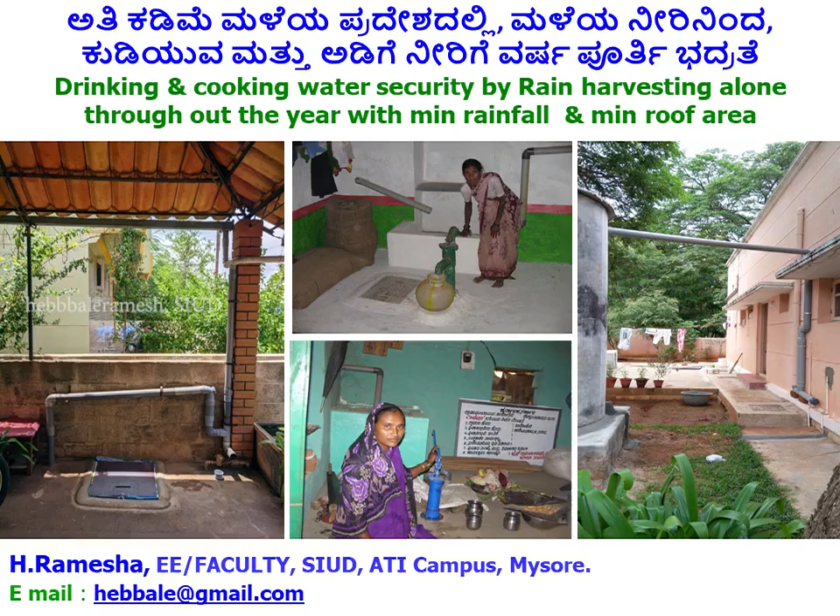In olden days, groundwater was enriched with forestation and the existence of tanks; recharging was going through a natural process. Now, due to urbanization effects, infiltration of rainwater has become less and runoff water has become more. Due to increasing population, industries, and over-extraction of groundwater from bore wells, the groundwater table level was drastically lowered.

Hence, in this session I will give importance to drinking and cooking water security by rainwater harvesting alone, throughout the year, with minimum rainfall area and minimum roof area. Before going to this topic, we should understand water resource availability in India.

We had 117 centimeters average rainfall, which is second highest in the world, more than 2,100 major rivers, 13 lakh minor irrigation tanks. We had the south-west monsoon and north-eastern monsoon, and perennial water sources from Himalayan snow rivers. Just imagine, if we didn't have the Himalayas, the Ganga basin would have become a desert by this time.

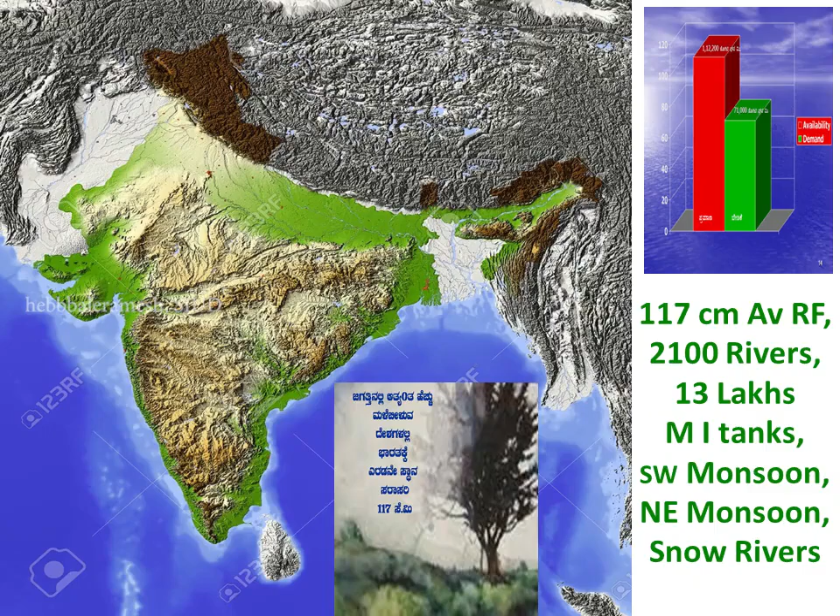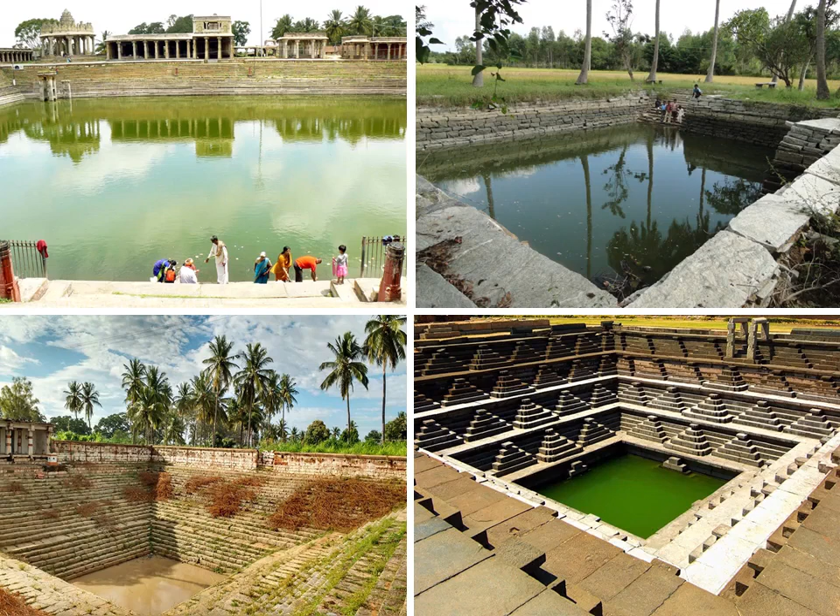Our ancestors had beautiful forethought about water conservation practices, with water management skill also. They had constructed beautiful architectural structures for water conservation for their routine uses. Also, our ancestors constructed pushkarnis, kalyanis, lakes, etc. for their utilization. Almost every village had water temples.

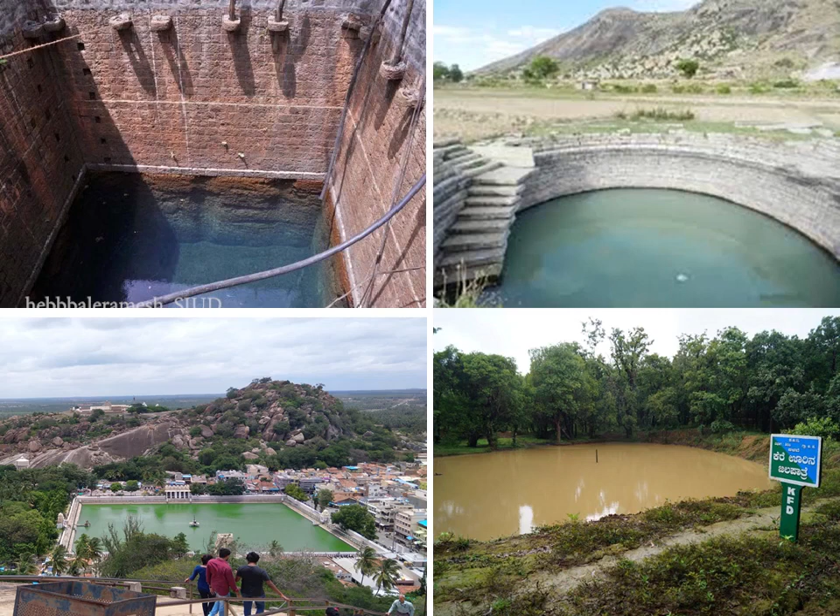They had also constructed stepped open wells, kund, kalyanis, pushkarnis near temples. Public tank or tanka water was used for drinking purposes. Now it is like engineering marvels to bring water and life together. Now, the situation is entirely different in India.

In places that may be desert, Himalayas, semi-arid regions or dry belt zones, there is compulsion to walk to bring drinking water for daily needs due to the highest water scarcity. For a few years, we are observing heavy movement of drinking water tankers due to scarcity of water, almost from villages to cities, especially during the summer, that is, during March, April and May, irrespective of highest rainfall area or

lowest rainfall area. Even though we had more than 4,500 millimeters average annual rainfall in the coastal, Western Ghat, Malnad area and 450 millimeters average annual rainfall in the dry belt region in Karnataka, with a difference in proportion of 1 in 10, even riverside cities are also facing drinking water scarcity during summer.

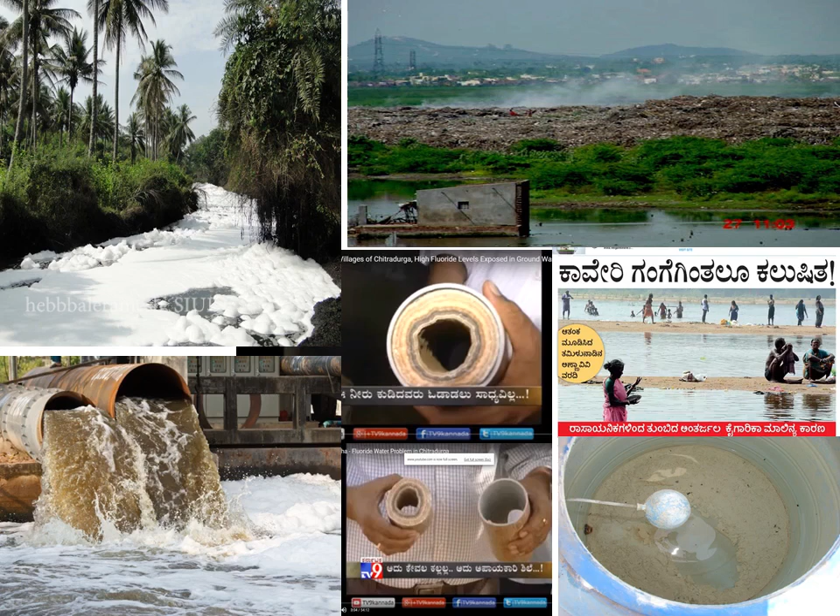We are observing, in almost all places, drastic degradation in quality of water and contamination of water sources in many ways, due to entry of industrial waste water, sewage water from urban areas, etc. Even water from bore wells was also degraded, causing hardening or scaling of water supply pipes, storage tanks, etc., which results in spoiling of plumbing fixtures and increase in maintenance cost.

Due to over-extraction of groundwater from bore wells, the fluoride problem is drastically increasing in that water. The usage of fluoride-contaminated water causes dental fluorosis, arthritis, bending of bones, etc. in human beings and also affects animals. Degradation in quality of water causes various types of illness, which in turn leads to suffering.

The presence of excess TDS, fluoride, aluminium, chromium, nitrates, sulfates, magnesia, iron, etc. in bore well or sourced water causes severe effects on health. The permissible limits of water quality parameters are shown as per Indian standards. If we drink pure rain water regularly, about 60% of the serious threats to health will come down without any medicine.

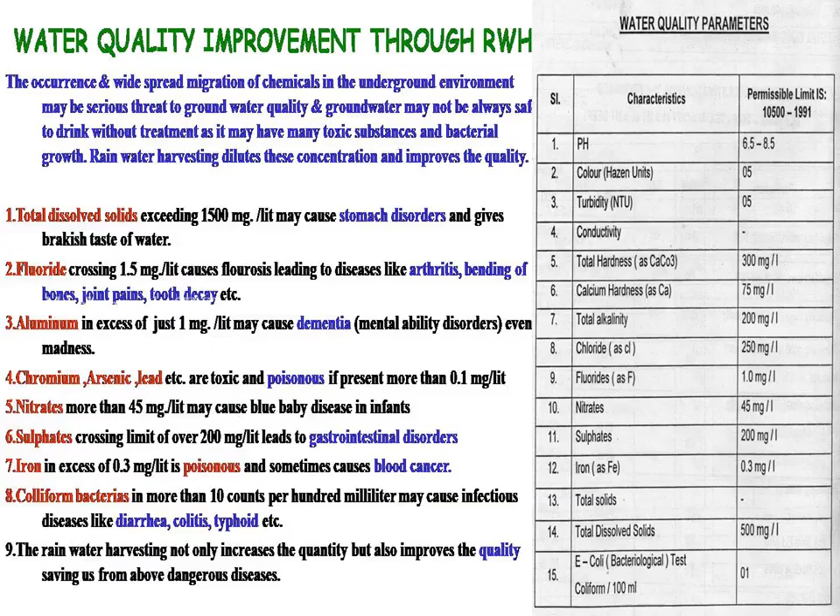Disadvantages of hard water at the domestic household level are: hard water is sticky with hair and skin. It does not satisfy thirst, especially during the summer. Heavy scaling of water. Dal is difficult to cook and takes more time, which results in consumption of more LPG gas.

By this it consumes more, which is expensive. Rice prepared with bore water looks yellowish and spoils early, especially in summer. Use of hard water leads to more consumption of soap and detergents, frequent maintenance of water supply fixtures, frustration and dissatisfaction in using hard water, etc.

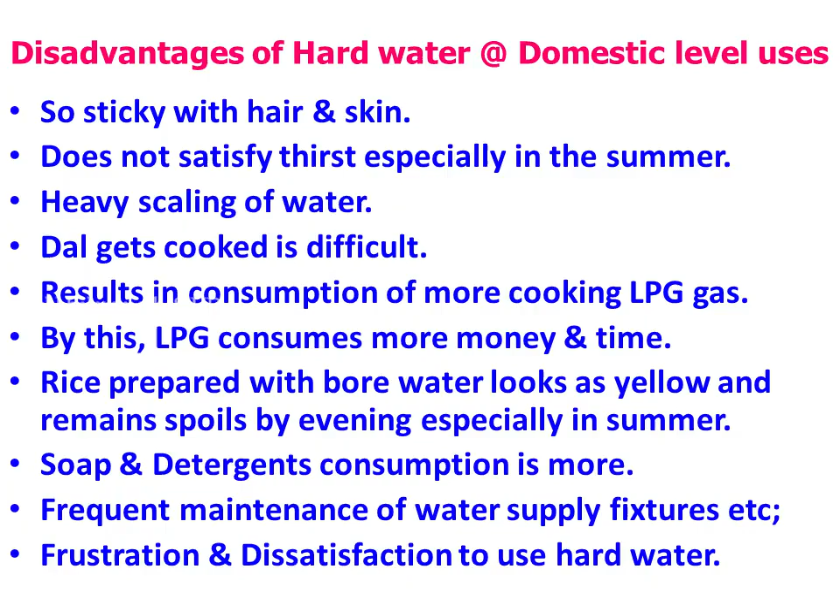Let us understand our mindset first. We are calculating the unforeseen bore well water yield in terms of 1-inch yield or 2-inch yield or 3-inch yield. But the irony is, we are not calculating the visible rainfall over us in terms of quantity, quality and its utilization. If one drop per second is wasted, it amounts to 20 liters of water wasted in a day. Hence, each and every drop counts.

We have to realize water is a community resource, which absolutely needs community participation. Also, water saved is equal to water earned. If we are aware of the calculation of rainfall quantity itself, our water literacy problem will be solved. Awareness or water literacy is the very first step towards mindset change. If we change our mindset, about 50% of the progress will be achieved towards water conservation.

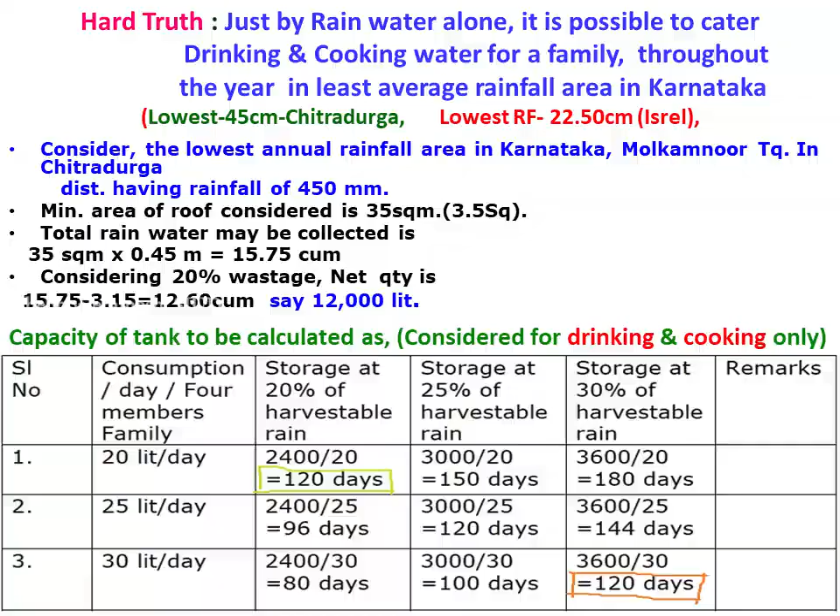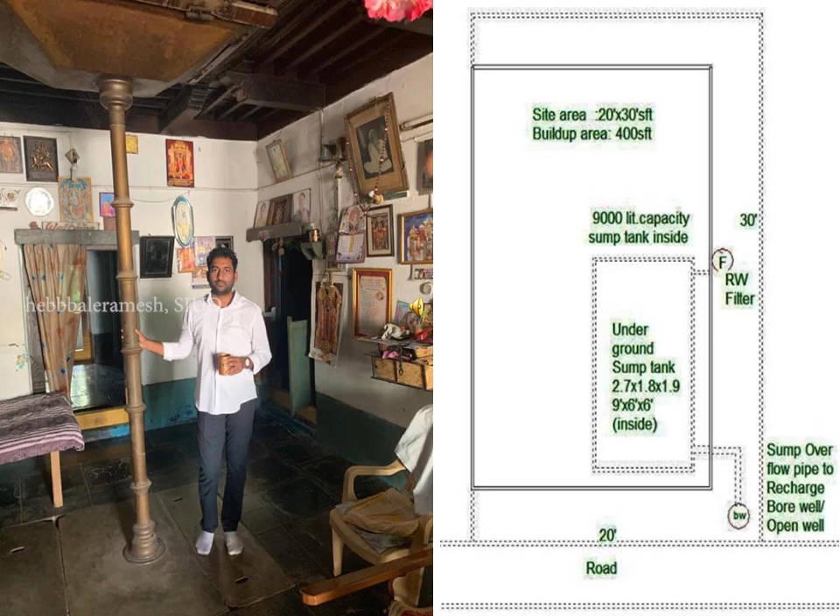Of course, this is not a new invention. In Rajasthan, our ancestors already provided this type of technique of rainwater harvesting from rooftop to underground sump tank directly, just by providing copper pipe. In the same way, it is possible to construct an underground sump tank inside a small house on a 20 feet by 30 feet site to store pure rainwater with instantaneous filtration. Overflow water can be connected to a bore well or open well, if existing, or to a recharge pit with cement rings, which should be away from the foundation with systematic planning.

Rainwater is the purest form of water available to us everywhere. Initially, rainwater should be allowed to go outside for about 5 to 10 minutes, depending on rainfall intensity. This will avoid dust and sediments getting into the storage. The roof area should be maintained clean. To maintain the purity of rainwater, we have to avoid exposure of the stored rainwater to sunlight and organic matter.

By experience, it was proven that the shelf life of rainwater is more than a year because of its purity. But the quality of treated surface or river water lasts hardly 7 to 10 days even after chlorination. Due to the purity of rainwater, the load on filtration will drastically reduce. Simple candle filters need cleaning once in 6 months with the use of rainwater.

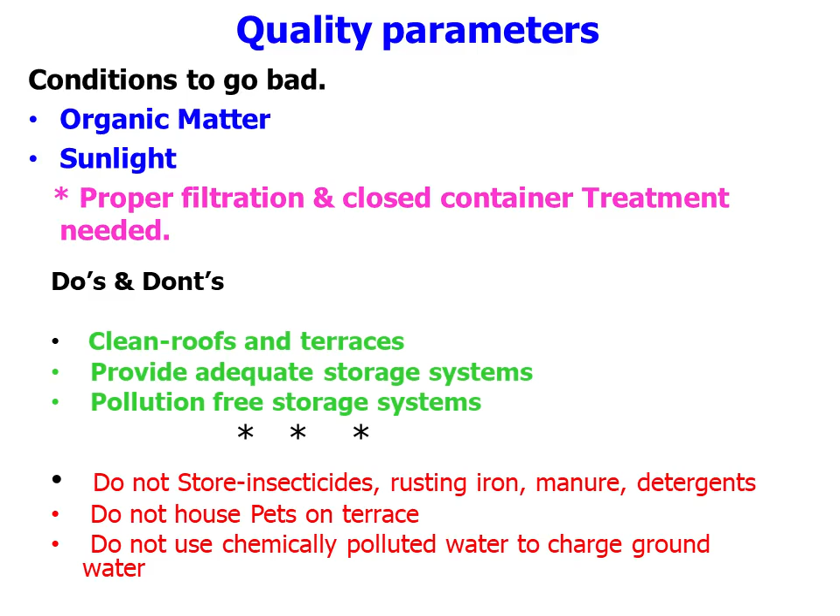If corporation treated water or river or bore well water is used with a simple candle filter, it requires cleaning every 10 to 15 days. By this, we can practically experience the highest level of purity of rainwater. Advantages of rainwater harvesting at household level are: getting pure, tasty and healthy water always for drinking and cooking.

Getting non-sticky water for bathing. Reduction in falling and graying of hair and reducing blackening of skin. No fear of electricity and pump repair problems from the corporation water supply. The consumption of soaps and detergents will reduce.

For washing of copper vessels, cleaning of floor, bathroom tiles, vehicles, results from rainwater are glaringly different. Dal gets cooked quickly in rainwater and it results in saving in cooking LPG gas. By this, saving of money and time. Rice prepared with rainwater remains fresh and in good condition even after 3 days.

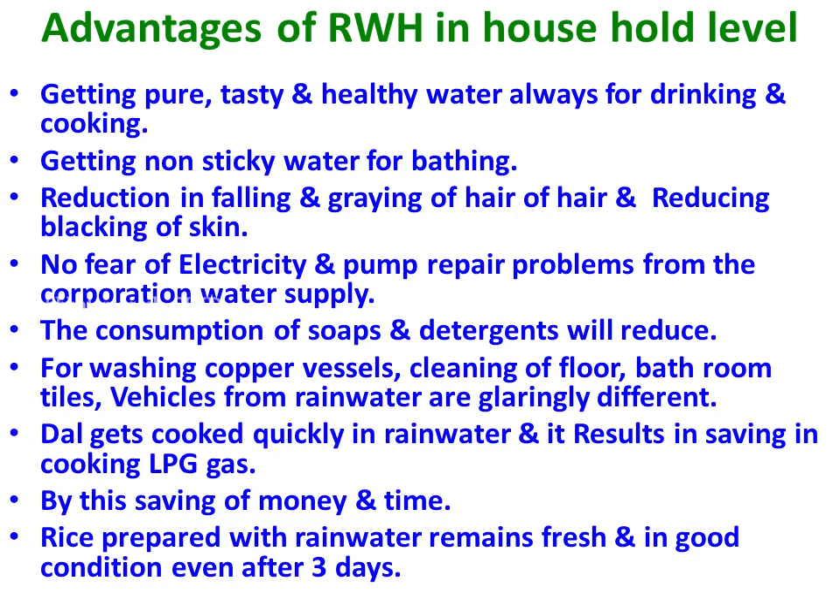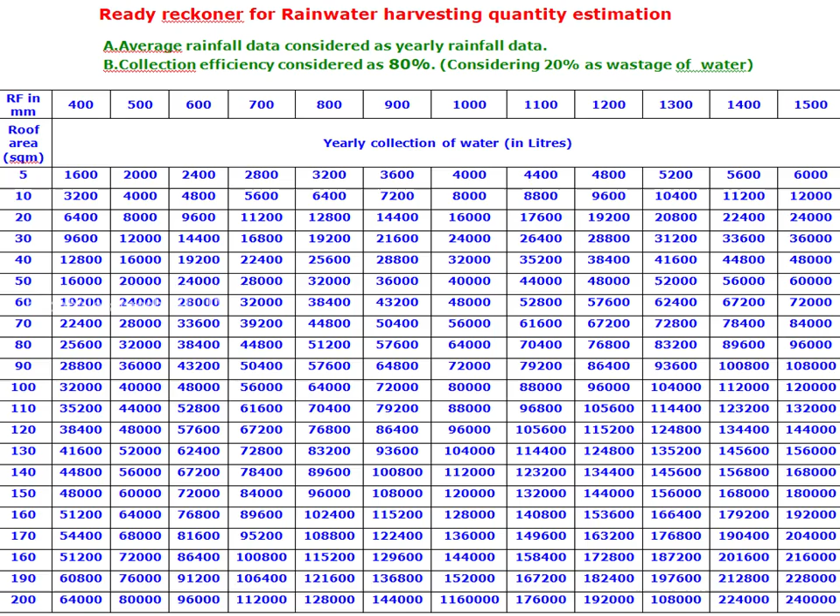This ready reckoner table will provide the net availability of rainwater quantity over the roof area, yearly average rainfall details and rainfall quantity. For example, if we consider roof area of 120 square meters over a 600 millimeters rainfall area, then net harvestable rainwater will be 57,600 liters excluding initial wastages of 20%, that is 14,400 liters.

Coming to the case studies on RWH, Rashtrapati Bhavan, Vidhana Soudha, Mysore Palace etc. were adopted for rain harvesting by constructing underground sumps below the lawns. By this rainwater, they are maintaining beautiful gardens and minimizing the expenditure towards municipal corporation water with commercial tariff.

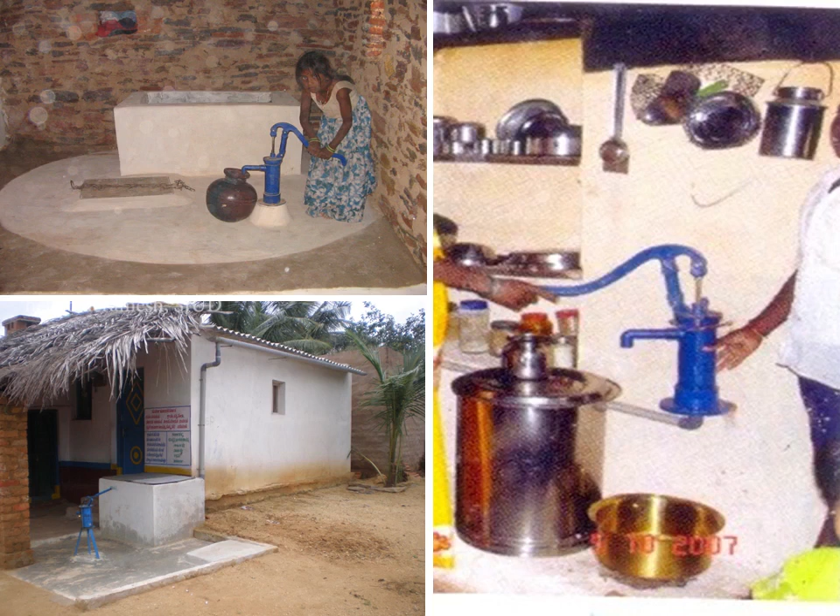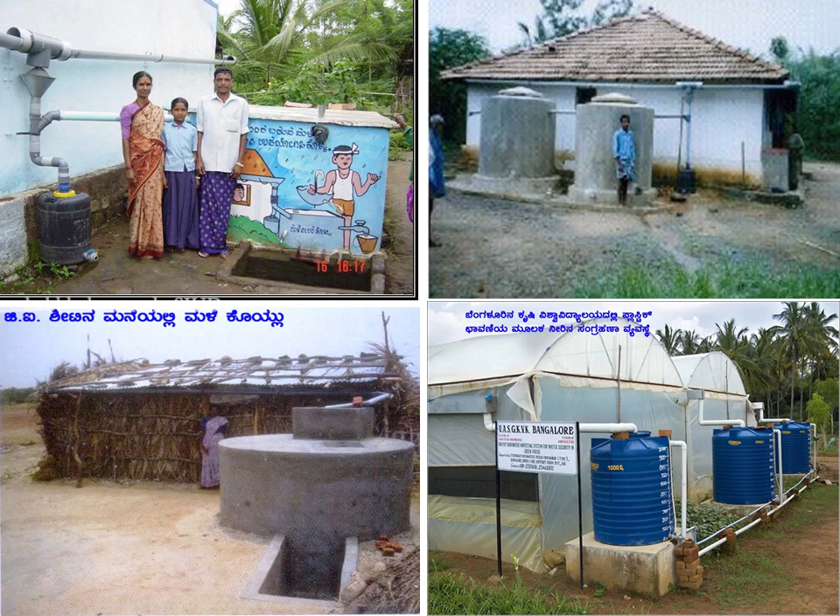Even inside or outside of the small houses and huts, it is possible to harvest rainwater with suitable plumbing arrangements and store it for long duration without exposing to sunlight and organic matters, and it can be utilized for drinking and cooking purposes throughout a year. There are many ways to harvest rainwater through any type of roof. Even with the non-traditional poly roof, it is possible to harvest rainwater with the observation of these examples.

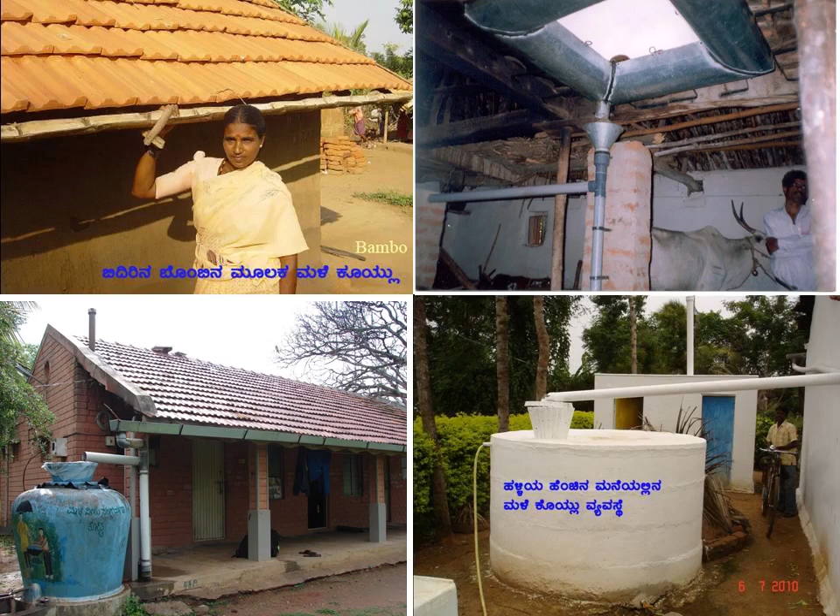Even with the bamboo gutter, GI gutter, CPVC gutter with suitable plumbing arrangements, it is possible to harvest rainwater with less cost. Suitable capacity of cement ring tank can be built above the ground level to harvest rainwater, and it can tap to required location or any filter media or directly to inside kitchen by gravity flow itself without any pump as shown. If harvested rainwater is stored in underground sump tank, it can be easily lifted through mini or small hand pump as shown for routine utilization.

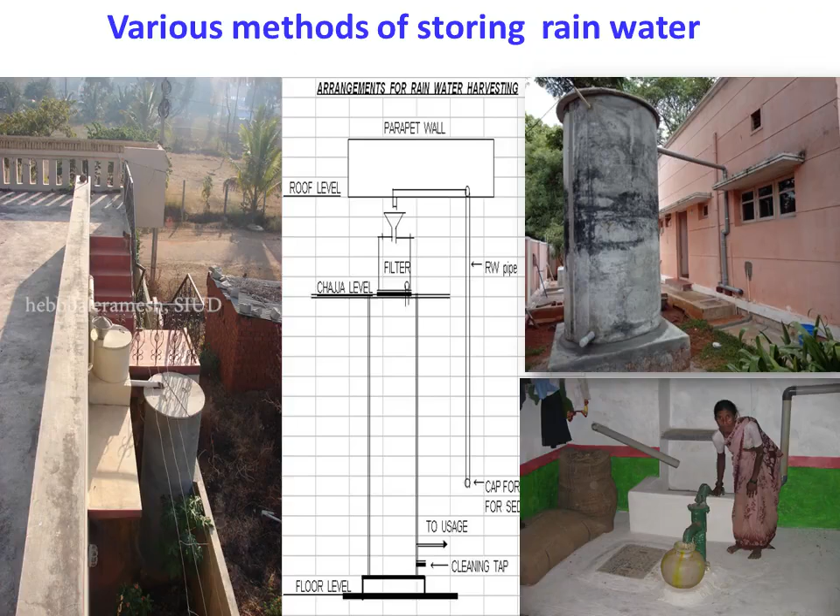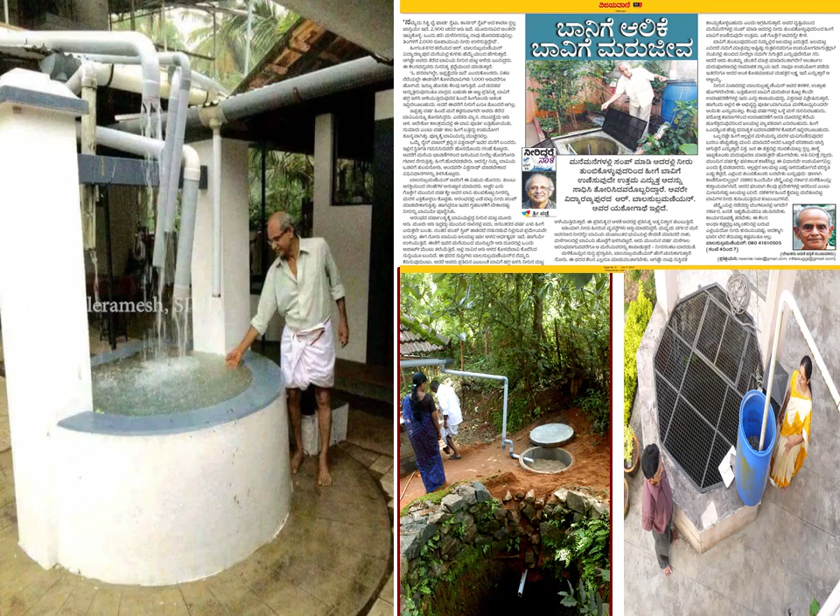Rainwater tank can also be constructed just below the first or second or any floor of the roof, or available space at staircase headroom with RCC tank to store rainwater with instantaneous filtration, and it can be utilized through gravity flow without any pump as shown. There are the various simple methods of recharging of open wells with rainwater to maintain sustainability, water security and to get assured water throughout the year.

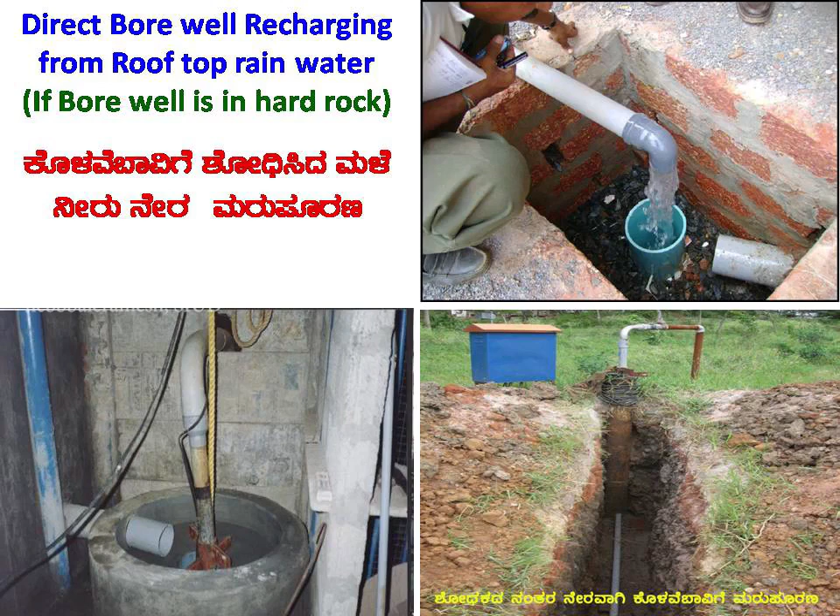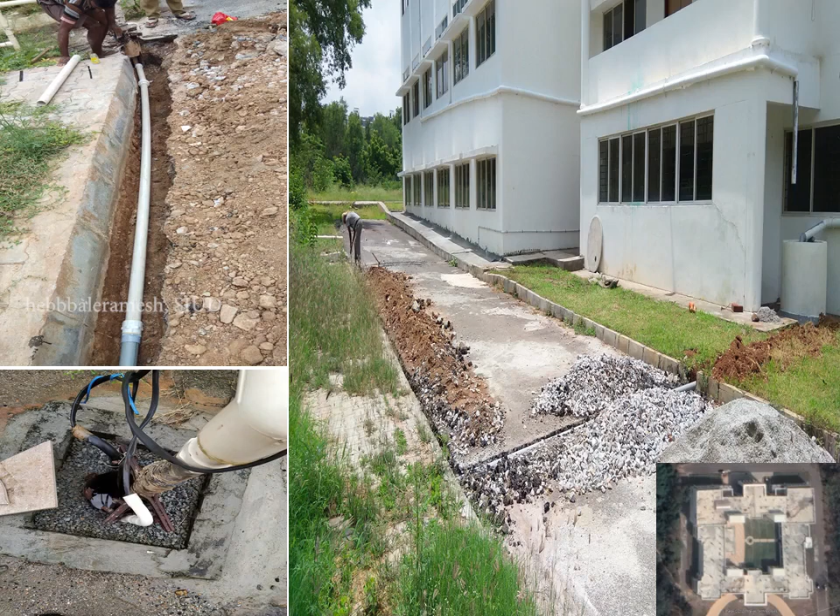These are simplest methods of direct recharging of bore wells. Rainwater can be diverted from rooftop with instantaneous filtration directly into the bore well if bore well is located in hard strata region. If bore well is not located in hard strata region, if there is any chance of loose strata or soft strata layers in bore well, then we have to recharge safely through jointless high-density polyethylene, HDPE pipe. This HDPE pipe is to be inserted into the bore well till it touches water top level in the bore well to avoid any damages, collapse of soft strata layer or scouring in the bore well wall due to gravitational impact of recharging rainwater as shown.

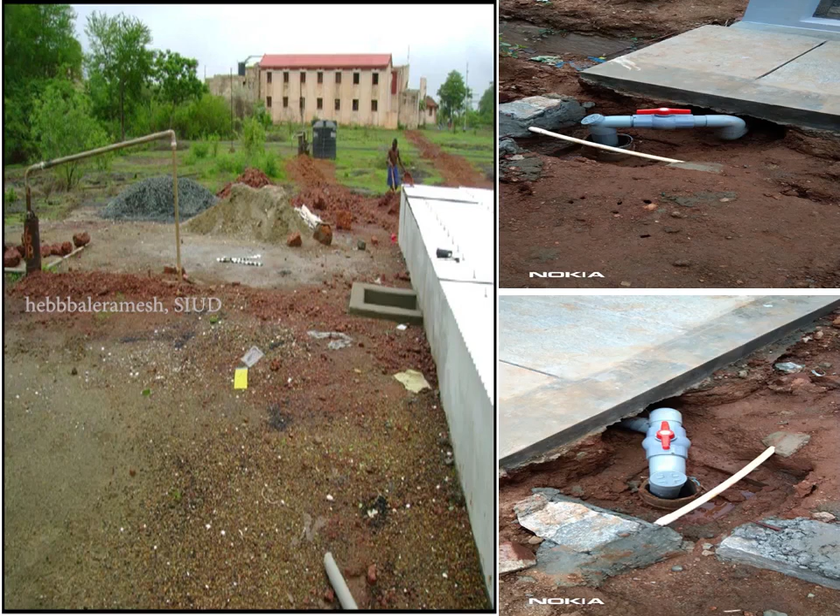Here, rooftop rainwater harvesting is allowed to underground sump tank after instantaneous filtration. When sump tank overflows, overflow pipe will automatically and directly recharge excess rainwater into the bore well groundwater. By this, we can harvest rainwater as well as we can recharge groundwater.

This is one of the case studies from University of Mysuru. 50% of the roof rainwater, that is 9.50 lakh liters, was diverted to 75,000 liter capacity underground sump tank, and another 50% of roof rainwater, that is 9.50 lakh liters, was diverted through CPVC pipe directly into the bore well and up to the water table after instantaneous filtration. Bore well water was tested before recharging and after recharging.

It was observed from the water quality test report that total dissolved solids was reduced from 1844 to 400. Calcium was reduced from 330 to 100. Magnesium was reduced from 220 to 125. And total hardness was reduced from 560 to 300. By direct recharging of bore well, quality and quantity of groundwater was improved drastically with dilution of hardness, and it in turn saves money on installation of new RO plant.

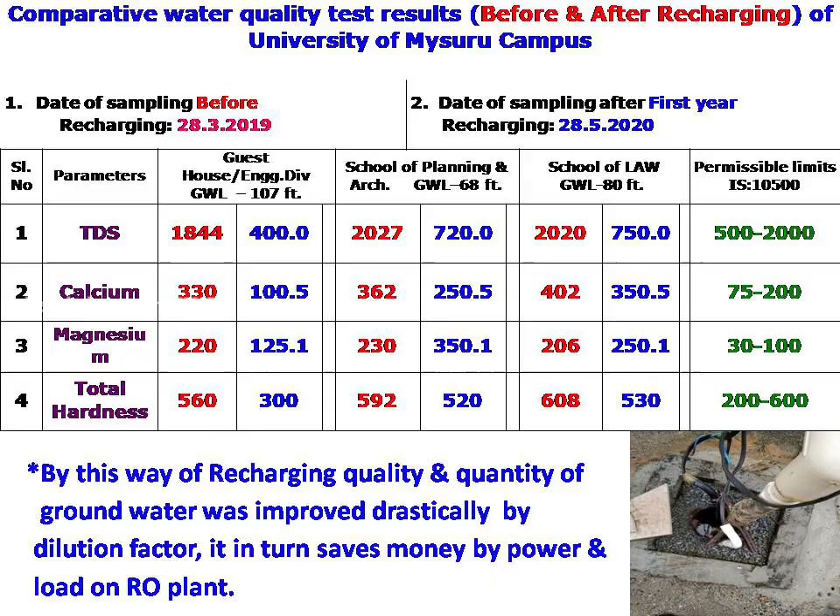With these points, I conclude this session on drinking and cooking water security throughout the year, with minimum roof area and minimum rainfall area by rainwater harvesting with self-dependence.